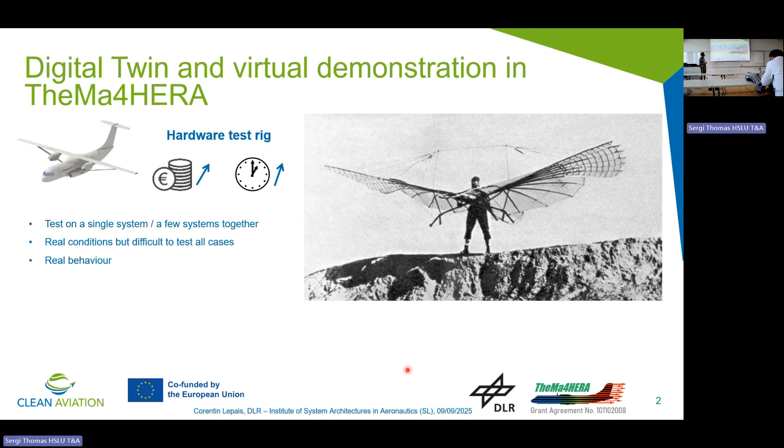On the other side, one solution could be to demonstrate the behavior of the system virtually. We can do a full simulation of the system to test it in different configurations. Compared to hardware demonstration, we have a lot more possibilities because we can simulate whatever we want. We can simulate one test case, or in the case of an aircraft, a complete flight mission in different environmental conditions, for example cold day, hot day, or standard day. And it's also usually less expensive and less time consuming.

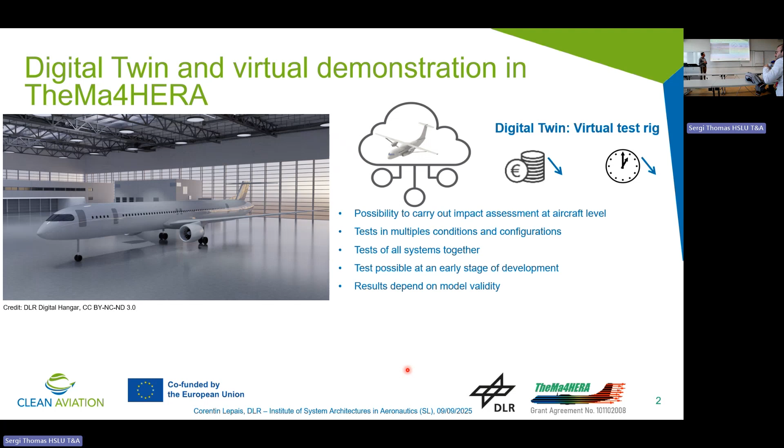But, and there is a big but, to make sure that we can use the results for validation, we need to make sure that the results are correct and represent the behavior of the system. That's the reason why in the project it has been decided to do a combination of both hardware test rig and digital twin simulation for the V&V part of the project. The idea is to do hardware test rigs for components. For example, we will demonstrate the behavior of a compressor or of a fan on a hardware test rig and make sure that it works as intended.

This hardware test will allow us to validate the model of this compressor. Then we can implement the compressor inside our digital twin, knowing that the model we use is a representative model of the component. And this demonstration is the one that has been chosen to achieve a TRL 5 demonstration at the end of the project for the complete thermal management system of the aircraft.

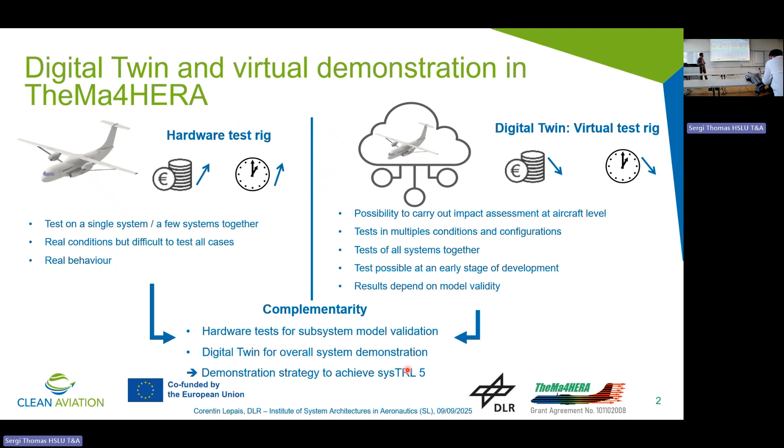In this presentation, we will focus on the digital twin part. We will leave aside the hardware part, because that's not what DLR is tasked to do in this project. The approach that we have chosen to develop this digital twin is the following. First, using Modelica and our library, the ThermoFluid Stream library, we are building an initial digital twin model, which basically defines the interface of the different subsystems and how they communicate with each other.

We also define simple and robust models to start showing the behavior of the systems and to have full simulations of the systems across a full mission. Even if the results are not representative, at least we know that we are able to run this kind of simulation. That's the reason why the surrounding models are very important, and the controllers will be the main focus of this presentation. It's not only about having a good model for your components, it's also having the correct mission model, environment models, and making sure that the controller is correctly controlling the system so that you can reach, for example, the desired temperature or pressure inside the cabin.

Then, second step, once we have built this initial digital twin model, we will improve it. The simple but robust models that we have developed will be replaced by high-fidelity models.

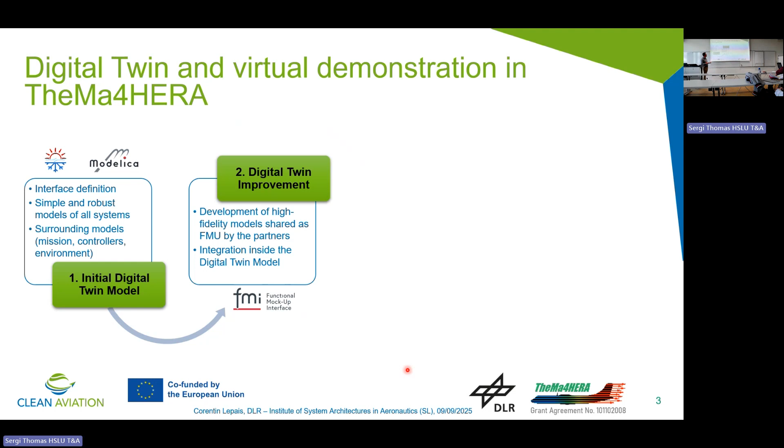Those high-fidelity models are developed by our partners inside the project, and then they share those models as FMU to the DLR, and we are tasked to integrate those FMU inside the digital twin. Once we have integrated the FMU, we have to validate that the integration is still correct, that the results still conform to the initial results of the models.

And once this validation step is done, we can do the proper virtual demonstration and then simulate the full system on complete flight mission for different test cases to get all the results we need for the virtual demonstration. So, as I said before, the main focus of this presentation is regarding controllers, and why controllers? It's related to this step.

In this step, we are integrating a high-fidelity model from the different partners, but this model takes time to be developed, and then they have to be validated with hardware tests, which also takes time. So we cannot wait to have those high-fidelity models ready before developing the rest of the digital twins, because it would be too late. So we have to do the development of the controllers and the development of the high-fidelity model in parallel.

And then what we have done, at least in this presentation, the idea is to say, okay, since we are building simple but robust models, we can use those models to develop our controller. And then the idea is to develop the controller in order to make sure that we can use it to stimulate the high-fidelity model and make sure that our integration of the high-fidelity models is working. And maybe we will have to change the controller, but at least we can have a first idea of the system behavior and if our integration is working.

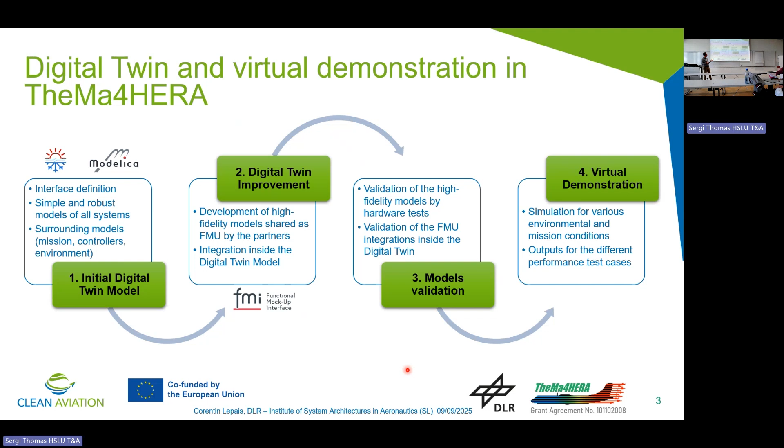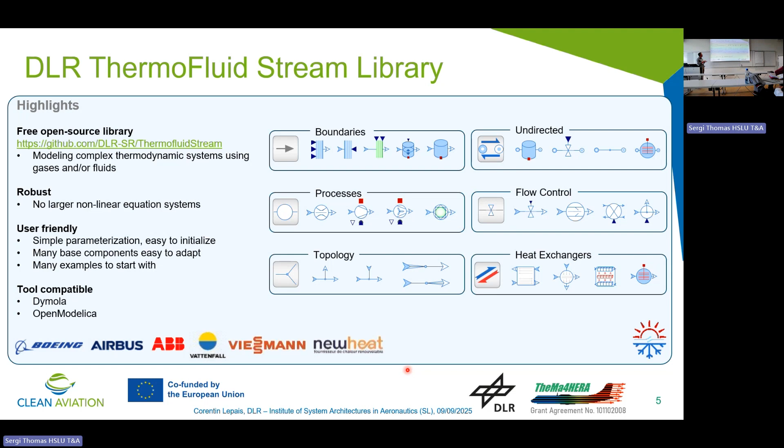But before focusing on the controller, I will give a short introduction regarding the model that we are considering. So, to develop this model, we are using our library, which is called the Thermofluid Stream library. It's a Modelica library for modeling complex thermodynamic architectures, and it's very user-friendly, which is one of the main reasons why we are using it. Also because it's very robust, it prevents having large nonlinear equation systems. And since we want to focus on the complete thermal management system, we want something that is robust so that simulation is a bit easier to do.

So now let's have a look at the systems that we are considering. In this presentation, we are considering an environmental control system for an aircraft. The environmental control system is tasked to take air from the outside, or from the engine if you consider conventional architecture, but in this case we are taking air from the outside, and to pressurize and control the temperature of the air to make sure that afterwards we get the proper temperature and the proper pressure inside the fuselage, and at a given mass flow rate, because each passenger needs to have enough air during the flight.

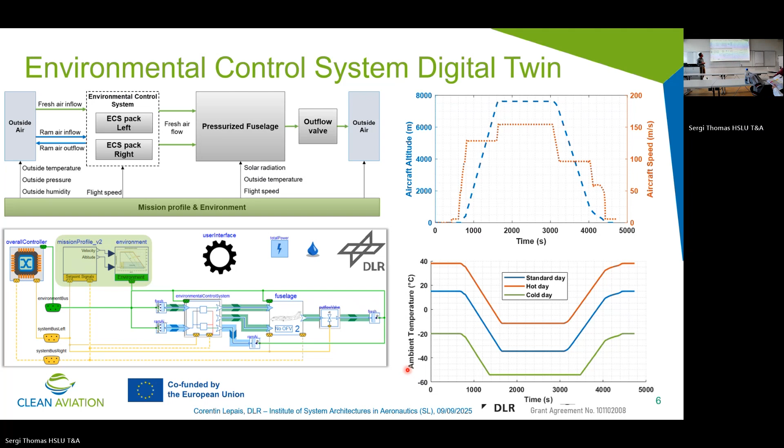So we are flying from ground to ground with a cruise altitude of 25,000 feet. And we are also doing this mission for different days: standard day, 15 degrees on ground, hot day, and cold day. Afterwards, if we have a look now at the environmental control system itself, it is made of two ECS packs in parallel. We have two ECS packs inside an aircraft because you need to prevent any failure or things like this. So the main reason is for redundancy.

And the model that we are considering for this ECS pack is a conventional ECS pack. So this here is the fresh air inlet, air that will be supplied to the cabin at the end. And in a conventional ECS pack, this air comes from the engine because it's already compressed by the engine and it's very hot. So there is a lot of energy available. So you can just use the energy that is already available thanks to the turbine to be able to control the temperature at this outlet.

But since we are considering electrical aircraft, we have replaced the bleed air inlet by fresh air inlet. So it's only air from the outside. And since we still need to compress it, we have an electrical compressor here at the inlet to have the compression stage that is now missing.

And afterwards, air from the ECS pack enters the mixer that you can see here. And here inside the mixer, air is mixed with recirculated air from the cabin, from the cargo bay, and from the avionics bay, and also from the cockpit, before being distributed into the different areas.

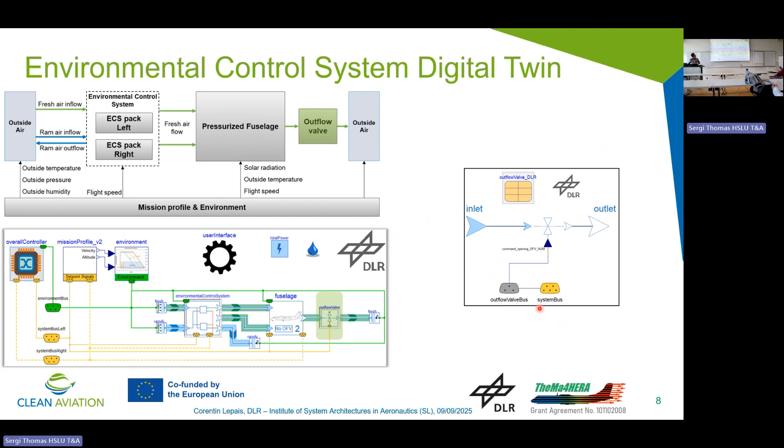Since inside the cabin we also have passengers, then we have a passenger model that you can see here. So passengers are breathing air from the cabin and then breathe out air to the cabin again. And they are also producing heat. So everything enters this volume. And finally, as I said before, we have the outflow valve for the pressure control.

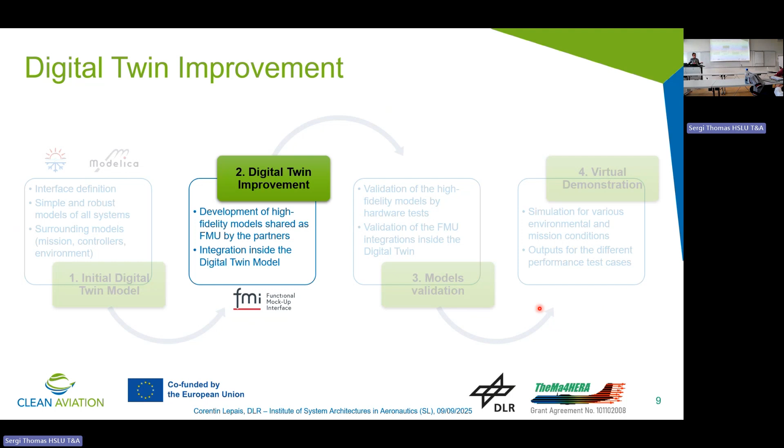Now that we have seen the base model, I can give you just a short example on how we replace those simple models by an FMU. So if we take the example again of the outflow valve, then we have our simple model above. And then what we do is that we get the FMU from our partners, and then we integrate this FMU using the component of our libraries to create an integrated version of this high-fidelity model. And then since both models are sharing the same interface, we can just replace it here and use the high-fidelity model when it is needed.

Here you see the partners that are working with us on this system. So Honeywell is responsible for the environmental control system, Fraunhofer for all cabin models, all cabin, cockpit, avionics, and cargo bay models, and Collins Aerospace for the outflow.

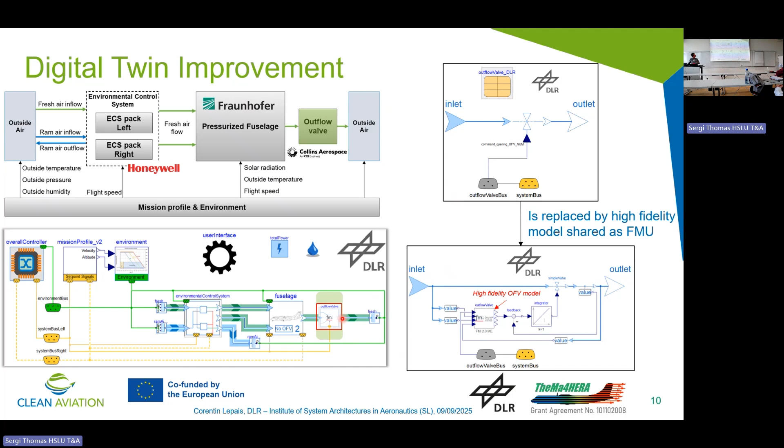So now that we had a look at our model, we can have a look at our prototypical control, which is the main focus here. So the system that I just presented, we want to control it at some set points. Those set points are mainly focusing on the cabin, so cabin temperature, pressure, and ventilation, and also the amount of fresh air that we supply to the passengers, because that's part of the certification.

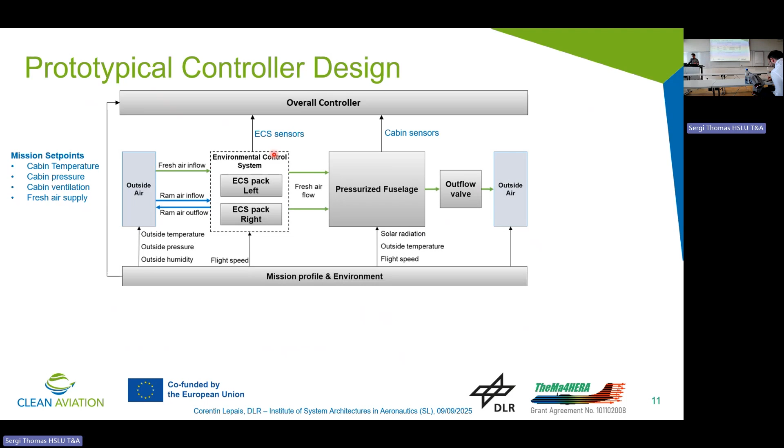So from our models, we have some sensors inside the ECS pack and also some sensors inside the cabin, since we are trying to control the cabin conditions, and we can control the different actuators inside the ECS and also the recirculation fan and the outflow valve. But how do we build this control, knowing that we want to have this control robust enough and also compatible with either simple models or high-fidelity models without having the high-fidelity models?

To do this, we have defined three main requirements: simplicity, adaptability, and robustness. So since we want something simple, we take a standard single input, single output architecture with PI controllers and first order for the sensor. And for adaptability, to make sure that if the actuator model changes for whatever reason, we normalize this command so that even if there is any change in the actuator model, on the controller part it doesn't change anything.

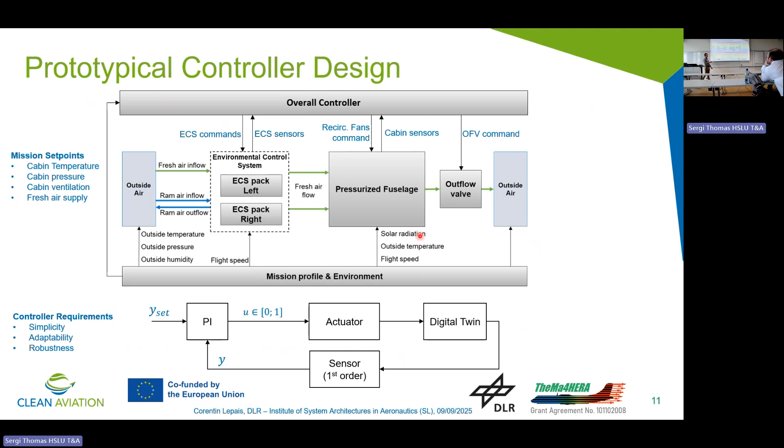Now, let's have a look at the different set points that we are trying to control. So if we start with the cabin temperature, we don't have anything to do because our actuator is a valve, and the valve is directly controlled with a normalized signal between 0 and 1, 0 meaning fully closed and 1 fully open. So there is nothing to do on this part.

So the only thing that this pack needs to do is to cool air, because in any case, we want to cool. But for cold day, this pack takes air from the outside, and on a cold day, air from the outside is very cold. So we don't have to cool, but we have to heat. And in the conventional architecture, there is nothing implemented to heat the air, and that's the part that is missing here that would allow us to have a cabin temperature control also on cold day.

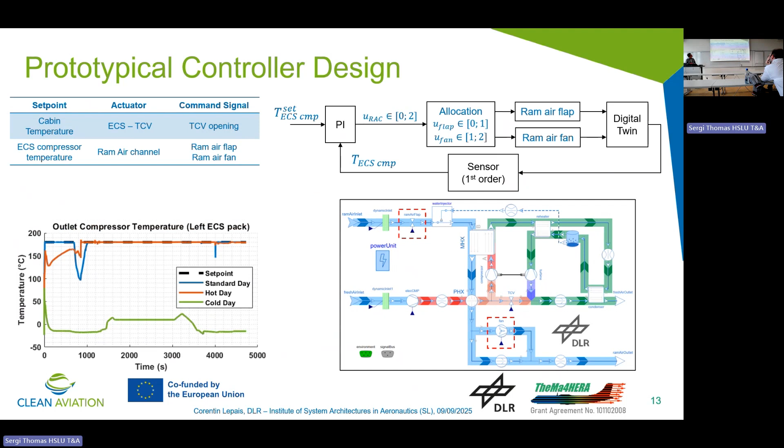Now, if we have a look at the ECS compressor temperature, since we have compressors, we want to avoid having too high a temperature at the outlet of the compressor, because then you have to size your compressor bigger, and it will also be more expensive and heavier. So the idea is to use the ram channel that you can see here in blue to control the outlet temperature of the compressor. But in the ram channel, we have two actuators.

We have a valve to represent the flap, and we have a fan to provide airflow mainly on ground. But in our architecture, we want to have one actuator, and the idea was to consider the ram channel as one full actuator. And since we have normalized the actuator command, we can just sum the two actuator commands. So instead of having a command between 0 and 1, we have a command between 0 and 2.

And then we can just allocate part of the command to the flap, and the rest of the command to the fan when it is needed. By doing this, we are still keeping our single input, single output architecture. And you see, we are avoiding a maximum outlet temperature above 180 degrees. And on a cold day, again, we can see that what we are lacking is really heat here compared to standard and hot day.

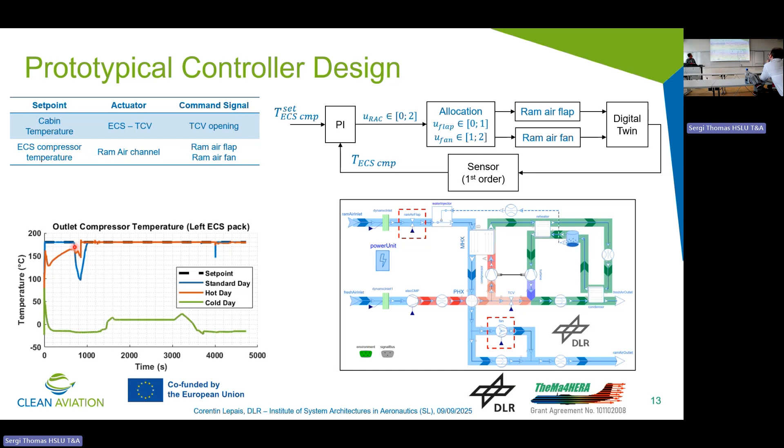Now, if we have a look at the fresh air mass flow, we have to control the fresh air mass flow to provide enough air to the passengers. And to do this, we control the electrical compressor, that's why we also have a compressor here. The only thing we have to take care of is that instead of directly sending the compressor speed, we send a value between 0 and 1. This speed has been normalized, and you just have to include the normalization factor in your compressor model if you change your compressor model.

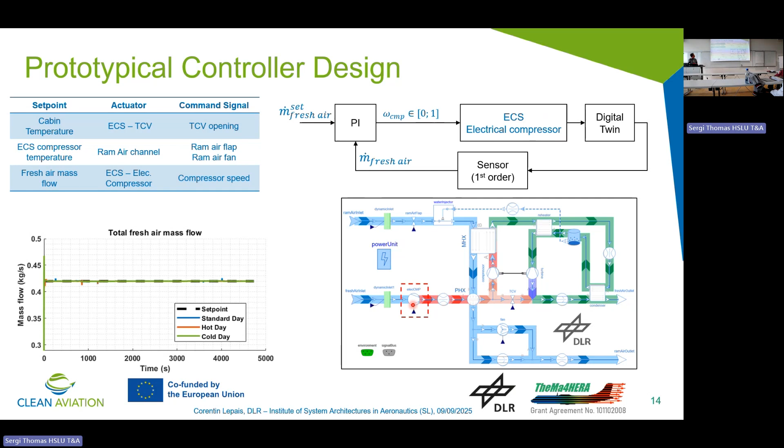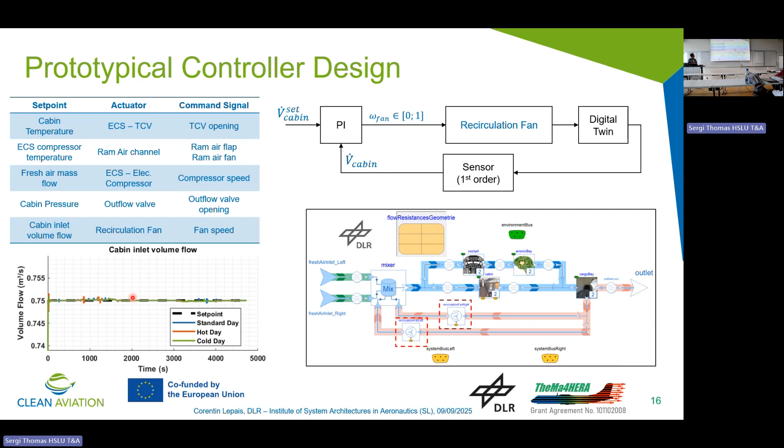And finally, if we look at the cabin ventilation, the idea is to have a constant volume flow at the inlet of the cabin for correct ventilation. So here, the idea is to have 50% fresh air flow from the pack and 50% recirculated flow from the cabin. That's why we have this target of 0.75, and we can control the ventilation at the target.

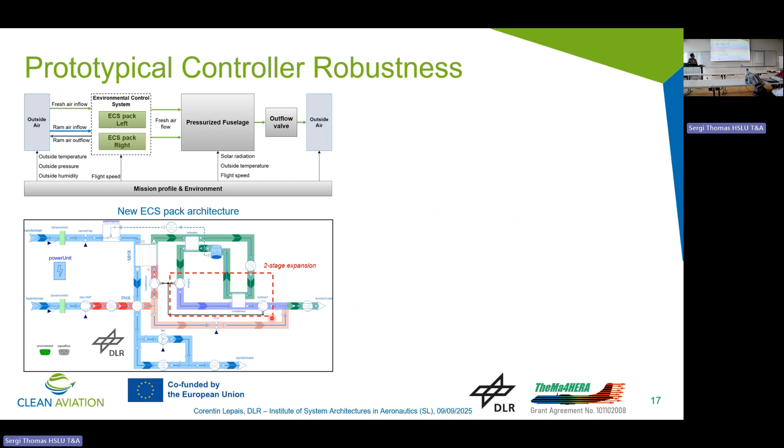So now, how do we evaluate the robustness? Because the idea is that this controller should be compatible with both the simple model and the robust model. So now we replace this initial ECS pack by a different version. Instead of having one turbine, we have two turbines and a two-stage expansion. This changes the dynamic of the pack. And now if we simulate our model again, we don't have to change anything in the control.

And we can see that we are still able to control the temperature with an error of 1 degree, which is completely fine according to the requirements. We can even make a comparison in terms of power, where we see that our second architecture is consuming less power for a normal day and for standard day and hot day compared to the initial architecture.

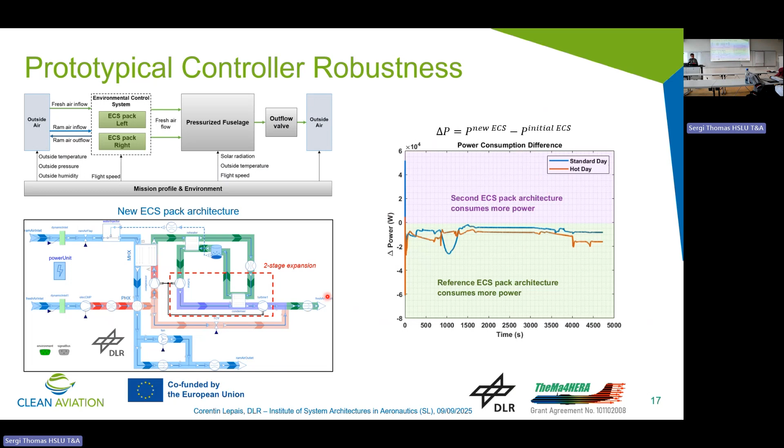So finally, so far we have built an initial model of the environmental control systems with working prototypical control that can be simulated for all flight conditions. And we have also validated that our controller is working for a different model, simulating the use of an FMU. But what needs to be done now is to actually use an FMU to see if it's still valid. Once we have done this, we just have to finish the validation to integrate all the FMUs, validate that the integration is correct, and then run the simulation for the virtual demonstration.